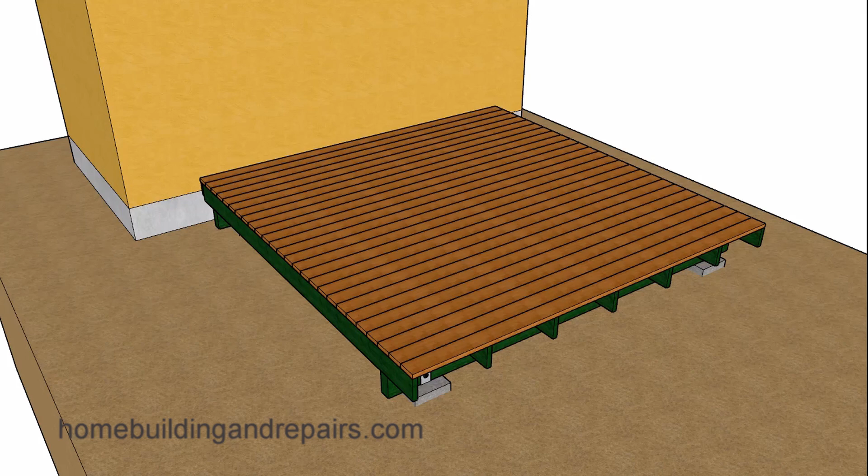Here is another helpful video for those of you who are not interested in wasting any more lumber than necessary when building a deck. And in this video, I'm going to provide you with 3 examples of how you can build a deck without any wasted lumber and without cutting one single board.

And by the time you're done watching the video, you're going to realize that you can apply this method to a variety of different decks that can be built in 2-foot increments. For example, an 8-foot by 8-foot deck, or even a 10-foot by 12-foot deck, or a 12-foot by 16-foot deck. However, you're going to have to break out the saw if you're going to build your decks in 1-foot increments.

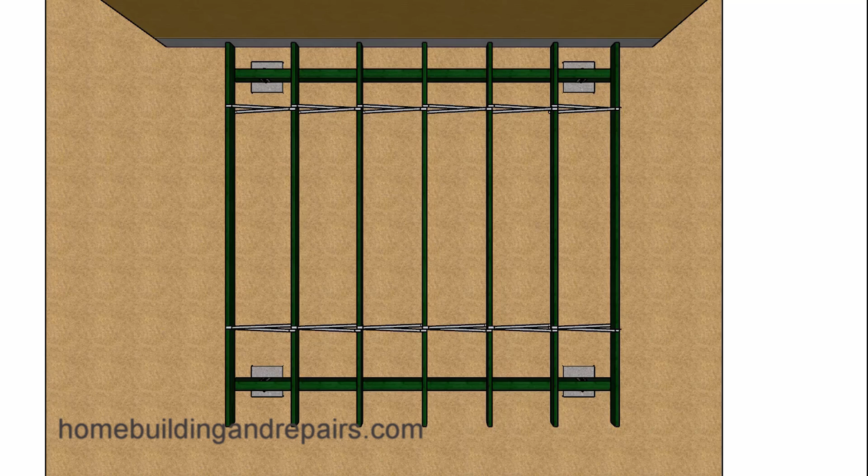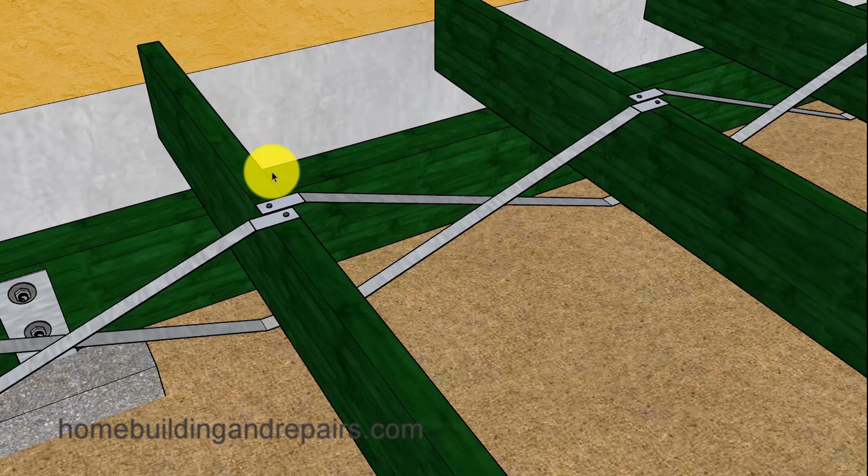So let's go ahead and take a look at the deck here. We're going to be using bridging here. However, you won't need to use bridging if you want to break the saw out and cut some blocks. However, if you do that, then it's going to defeat the purpose of this video. And don't worry about doing that. If it's going to be easier for you to use blocks than the bridging, then I say go for it. But I'm using the bridging because I'm providing you with a deck that can be built without any cuts.

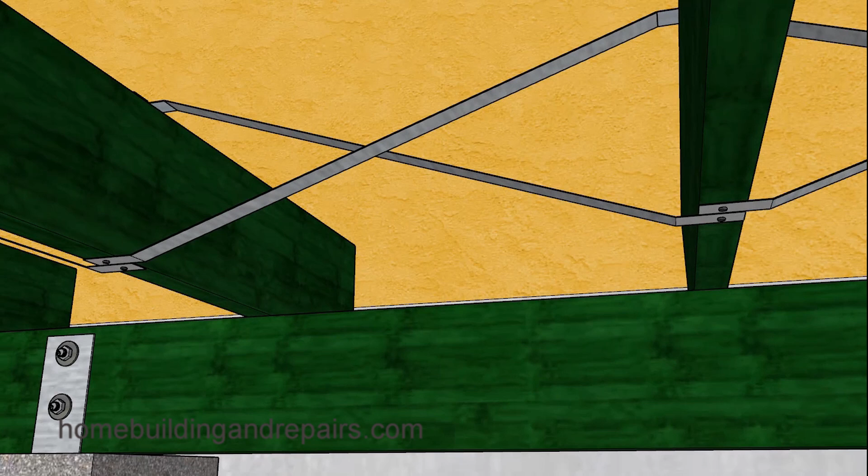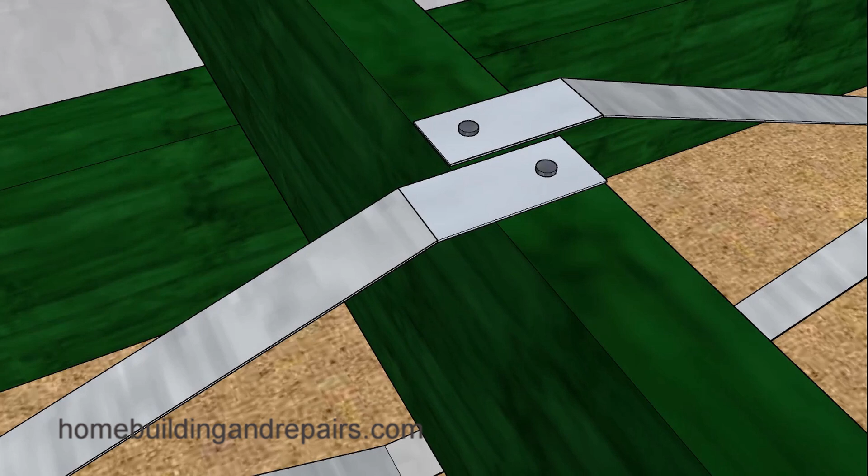And of course, the bridging is going to be installed from the bottom and the top. And you will need to purchase the correct bridging, which might require you to purchase a certain size joist. Again, something you will need to think about during the design phase. And for this project to work, the decking and these beams will need to be the same size.

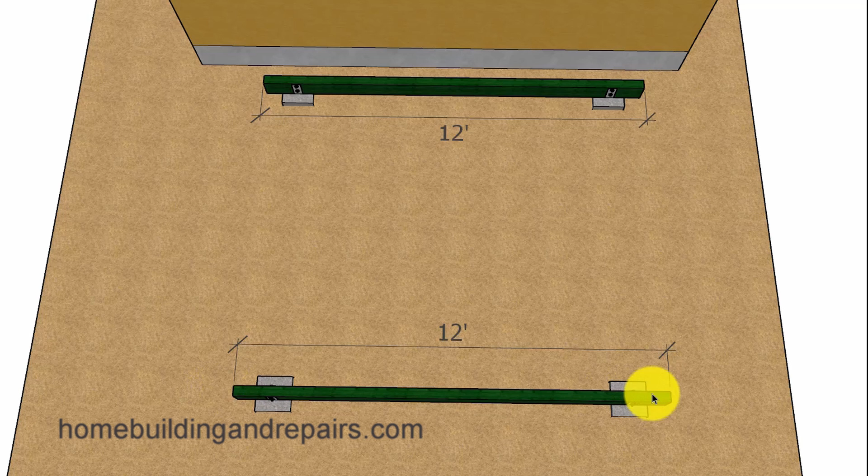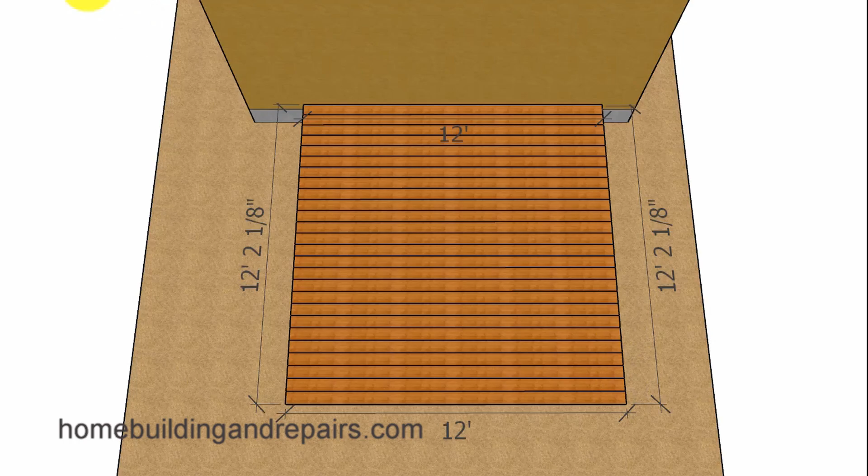However, if I want to change the length of the deck, then I can do that by installing different sized joists. For example, maybe 8 10-footers or 14 or 16-footers to provide us with our 12-foot by 12-foot 2 1/8 inches. And you're probably wondering, how did we end up with this measurement here? And that's because we lined our first decking board up with the edge of the joist, and then we left an 1/8 of an inch gap in between each one of the decking boards, only to find out that when we got over to here that this last board is going to be sticking out a little further.

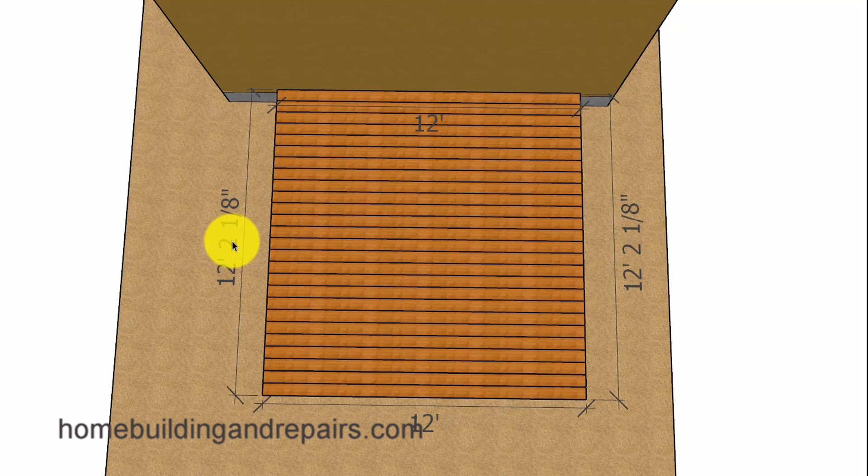So to fix this, all we need to do is nail another board, maybe a 2x4, onto the end of the joist, or a piece of decking like I have here, depending upon what lumber prices are at the time of when you're building your deck. Or if you want to break out your saw, you can rip this last decking board. I will leave that up to you. And that's why we get a 12-foot by 12-foot 2 1/8 inch deck this way.

Now for our second example, I'm going to reduce the length of the deck. And again, this isn't going to be difficult to do. I'm going to use 8-foot long joists. And to provide you with another example, I'm going to run the bracing down the center, because this might provide us with enough structural support to prevent the joists from leaning and save you a few dollars on your project.

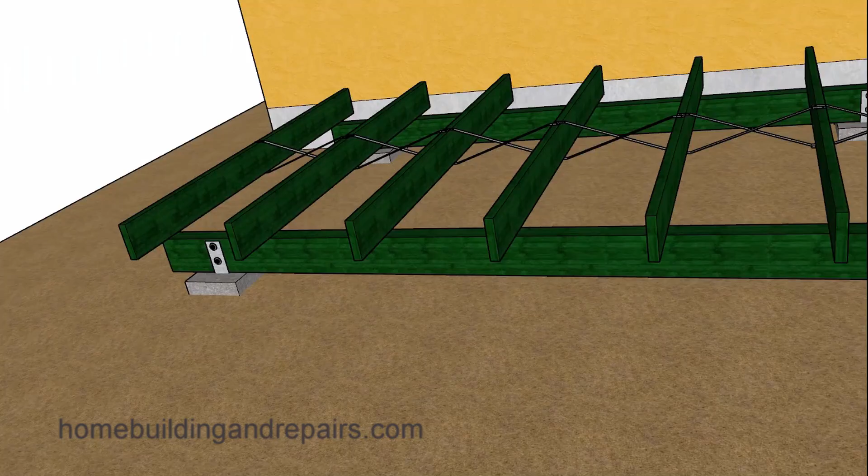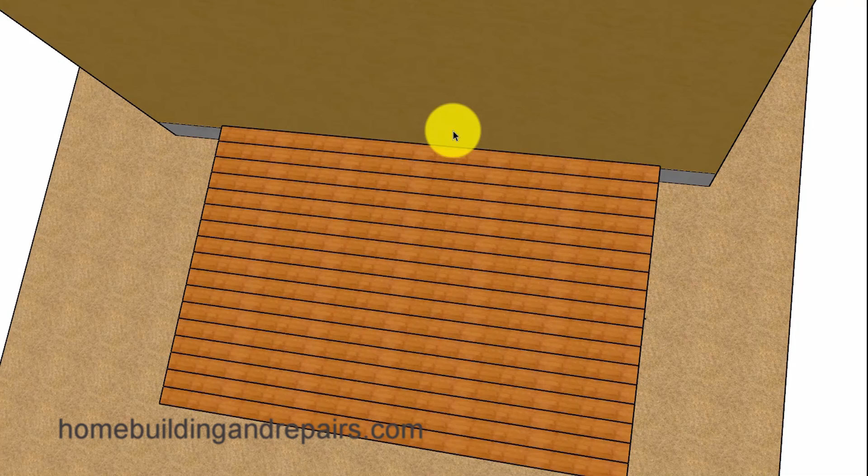Now in this example, I'm not going to have the same problem with the decking. If I start at the front and then have an 1/8 of an inch gap in between each one of the decking boards, I'm going to end up with a situation like this where the joist is going to be a little bit longer than the decking. However, if you don't like that, I'll provide you with an example of how you can fix that also. Again, without using a saw to cut any lumber. And since we are a 1/2 inch short, we're going to end up with a shorter deck. Instead of our 8-foot by 12-foot, we're going to be a 1/2 inch short.

And in our last example, we are going to have a longer deck, which again is just going to require us to have longer support beams and possibly another concrete footing in the center if the span of our beam isn't going to work. However, we could always increase the size of the beam to eliminate the footings, and that's going to be something to consider when you're designing the project.

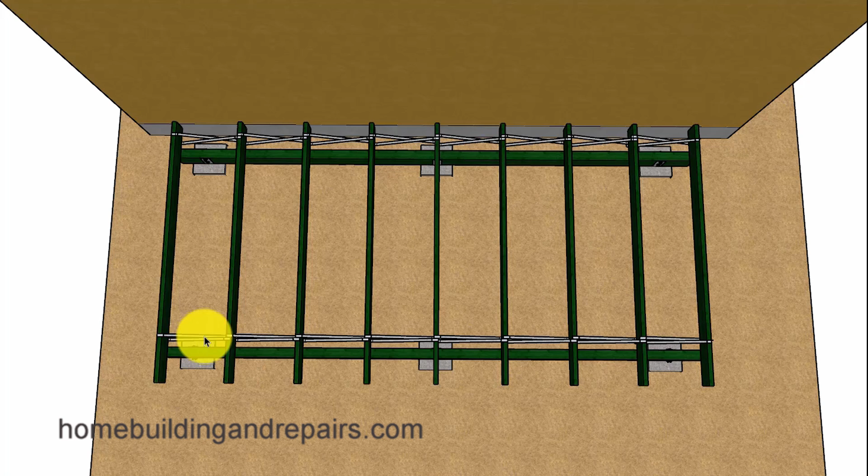Now in this one here, I also moved the bridging closer to the end to provide you with another example of how that can be done. And it wouldn't be a bad idea to install the bridging near the ends, except if you have a situation where you have a span greater than 10 feet, then you will also need to run another row down the middle.

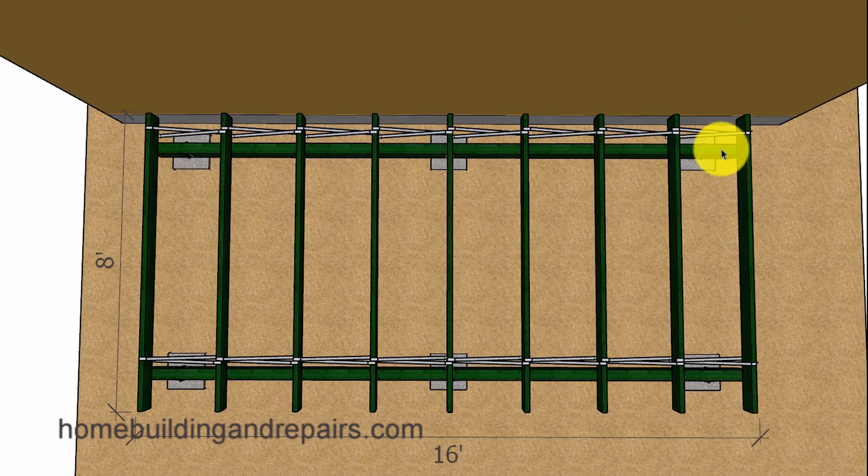And of course, you can see here where the 16-foot decking is going to match with the 16-foot long beams. And then I'm going to go ahead and space the decking a 32nd of an inch wider on each joint so that I can get rid of the 1/2 inch gap that I had here. And even though I'm suggesting this, I'm not saying that you can do it, especially if you are using lumber that might not be completely dry yet and is going to shrink and leave you with a 1/4 of an inch or a 3/8 of an inch gap that could create a safety problem.

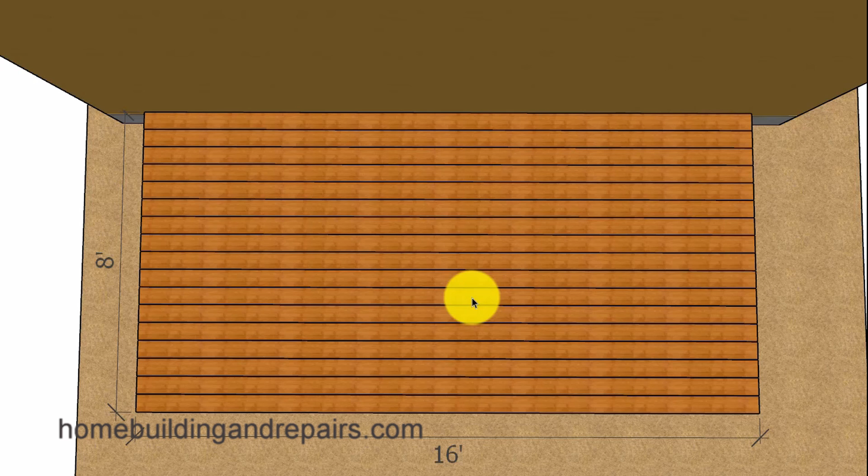And as always, check with your local building authorities to verify the information in all of the videos you watch on YouTube. And of course, now you have another tool for your construction toolbox. And I would suggest to put a little thought into your design and the building process to maximize the square footage and reduce the amount of waste for your next deck building project.